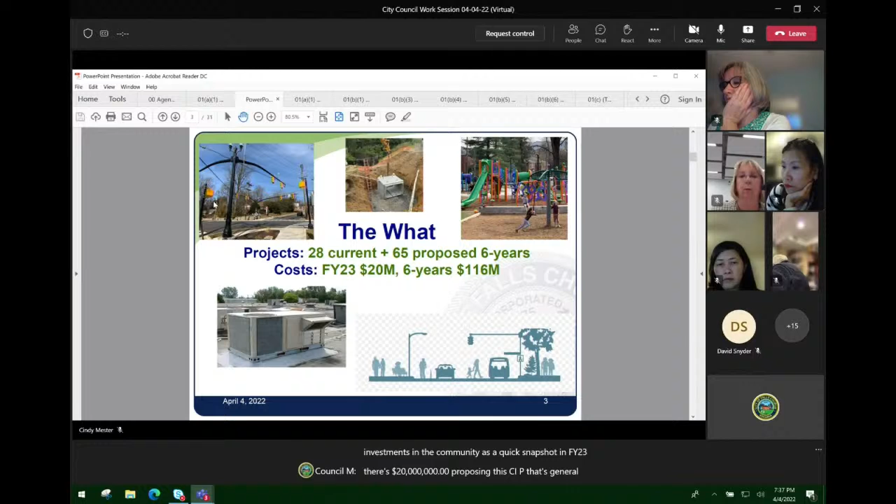As a quick snapshot, in FY23 there's $20 million proposed in the CIP—that's general fund, transportation, stormwater, and sanitary sewer. Over the six years, you can see $116 million. A lot of good active projects are underway, and we give you that update in the quarterly snapshot. The January 22nd snapshot, the most current, is posted with your packet this evening. A lot of great accomplishments as we continue to deliver projects on time and under budget, meeting community needs through the COVID period.

Now jumping right into projects, I've organized the next few slides by the functional categories as they're posted in the CIP. Everything is on the CIP with the link you received this afternoon via email, and it will also be in the slide presentation at the end. For each of those, you'll see I've flagged a tab notation here on this slide, so if you go to tab 4 or 5 on the website, you'll get more detailed information for these projects that we've summarized here.

You'll see the same for Rec and Park or Utilities, for example. Under public safety and information technology, these are really our core infrastructures. There is funding in the CIP for Fire Station 6, public safety radios, facility security, and core infrastructure reinvestment on the IT front. A few highlights that I'll make for each of these projects, and of course myself and staff will be glad to answer any additional questions on a deeper dive.

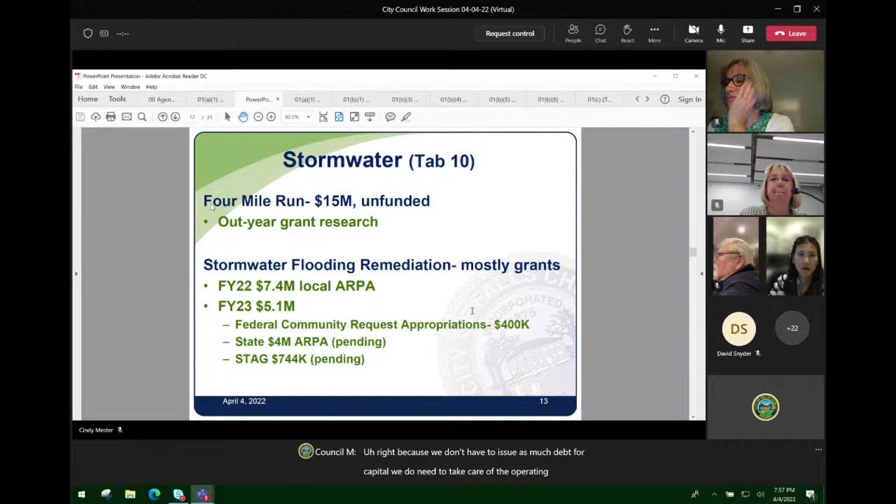Now, where are we in terms of some of the projects? I wanted to highlight that. We have quite a few projects in planning and design, some with planning complete, and we can proceed into construction, as you can see. These are outlining the big 6, as well as the greening of Lincoln, which is $2 million. Under transportation, I noted the $2.5 million for the Lincoln greening project, which is both transportation and stormwater.

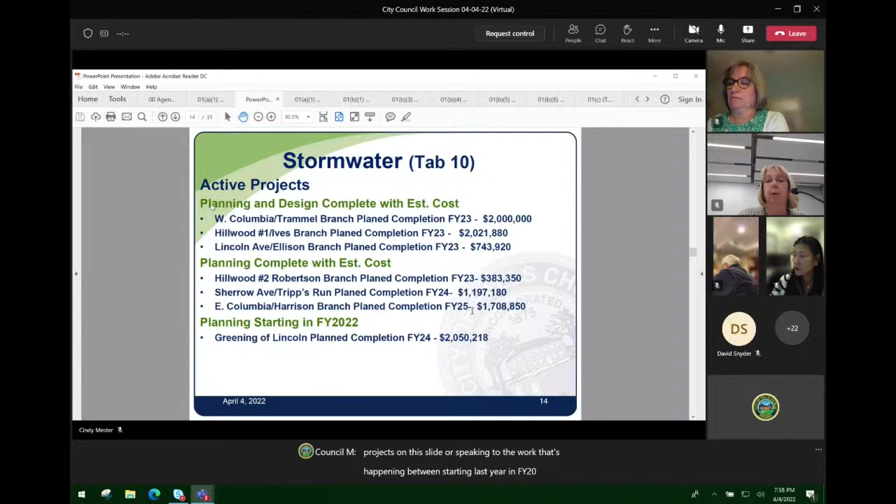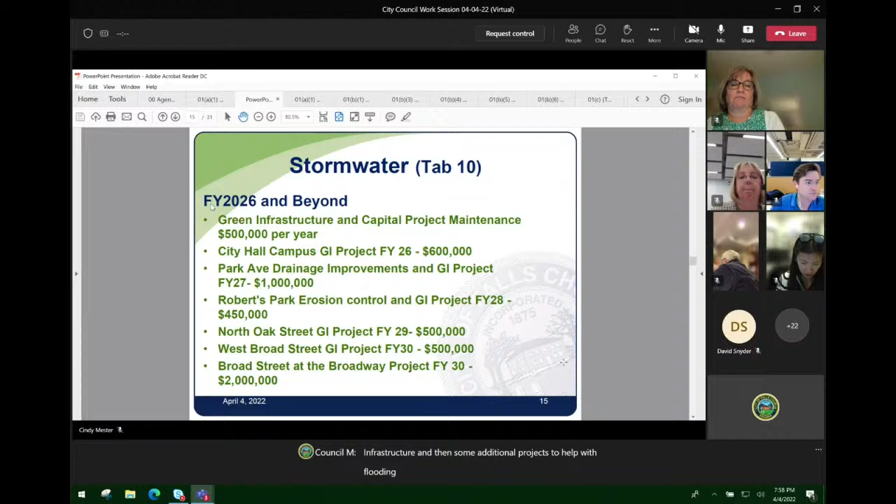And then the CIP also looks towards the out years for additional funding from FY26 and on, because a lot of the projects on this slide speak to work happening starting last year in FY22 through 24 and 25. The completion dates are listed there for you, but we want to make sure we're still continuing to look ahead and address additional projects known from the task force work, the original watershed plan, as well as staff assessment. So you can see here an ongoing commitment to green infrastructure and some additional projects to help with flooding remediation. All of these, sanitary sewer and stormwater, are under tab 10.

So we talked a lot about the what, a little bit about the how, and then we'll open up for questions. In the CIP, we did continue for the second year the equity lens and have added the environmental impact lens that was directed and requested by the Planning Commission. Both of these are the same lenses used as part of Council's legislative program as well. Staffing.

We have a lot of projects, as I noted, and a lot of grant dollars and funding committed to these, but we've got to be able to execute and deploy. So I wanted to provide a synopsis of where we are on staffing.

Under the existing column, we've organized it by project management, procurement, contracts, and grants. We definitely have to have staff that can oversee the concept, design, engineering, and then execution, implementation, and construction. But we also need procurement, contracts, and grants. That's an important piece, especially now that we're doing significantly more with federal funding, which requires a different level of procurement, contract, and reporting. In terms of ARPA, it significantly escalated the reporting we'll be doing to the U.S. Treasury.

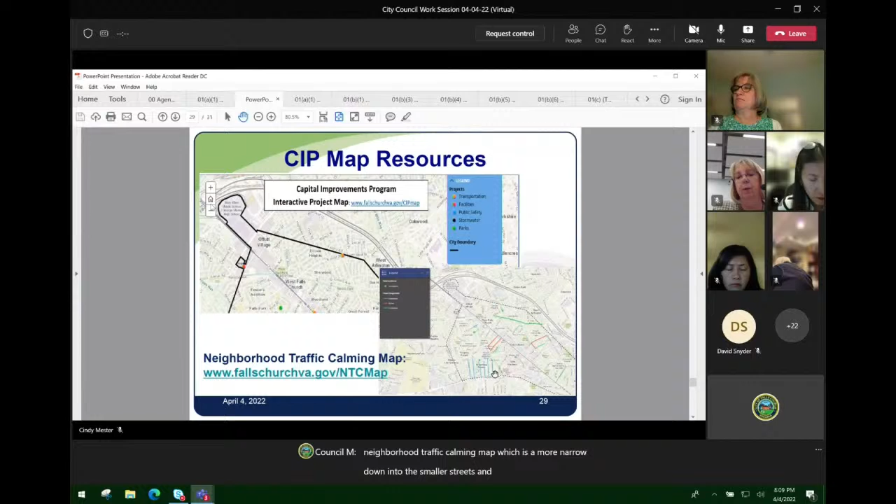So those are both on the website and community resources, as well as the website links we've mentioned previously for the budget as a whole and the CIP in particular. Both of these links will get you to the new videos that have been produced for our budget, the departmental ones and the CIP one. And then for the public, how to reach me with questions.

And with that, Mayor and Mr. Shields, I'll be glad to pause now and look forward to comments and questions.

All right, thank you very much. Thank you for that very thorough presentation. As I'm sure is obvious to all, there's lots of capital work being done here in the city and lots planned for the future. And as you mentioned, we have been aggressive in seeking grants to ease the burden on our taxpayers and have been quite successful, with a number of projects going up throughout the city over the coming years and in the past years that are funded in part or in whole through grants.

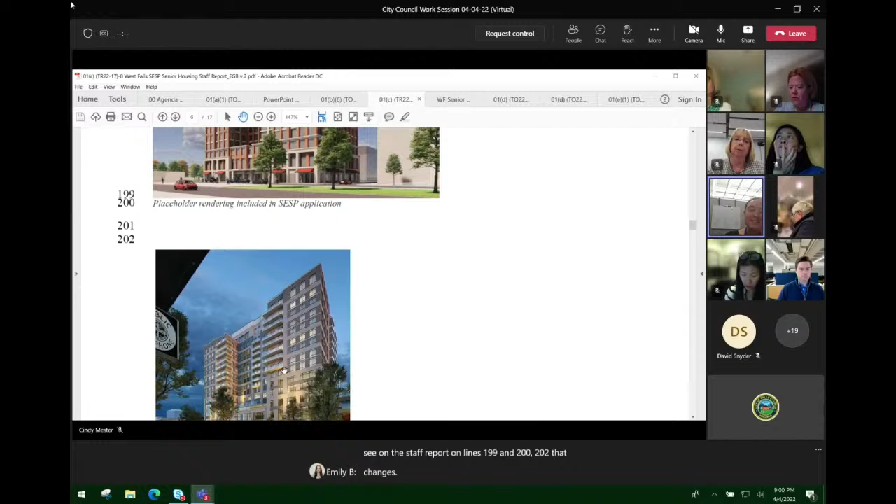We went from a red brick material to a more white-gray brick material. You can see on the staff report, lines 199 and 202, the changes. The changes in the renderings are very nice images that kind of point those out.

We also had a change in unit count and unit size. The unit count change was nothing too substantial — we went from 215 to 212 units. We also had a slight change in parking.

For the comprehensive plan analysis, that begins on line 221. We also have an analysis of urban design guidelines and a look at the past ULI TAP study, which begins on line 296. Again, going through comprehensive planning goals, they begin on line 330, and then moving into our special exception site plan analysis, where we go through the primary criteria and then secondary criteria. This begins on line 395 of the staff report.

To wrap up my presentation, I have two more things. Line 555, the fiscal impact analysis. After further discussion between planning and the EDO, staff does not believe it is necessary to rerun the FIA, as the change in unit count is so minor.

And then timing. So right now we're with you guys in your first work session on April 4th of 2022. We anticipate coming back on April 25th for a first reading and then a boards and commissions referral.

Something important to note about the boards and commissions that will be seeing this project: we're only including the code-required boards and commissions. So we have the Economic Development Authority, which is part of the land ownership group, the Architectural Advisory Board for architecture changes, and the Urban Forestry Commission, in addition to the Planning Commission. We have a second council work session noted for July 18th of 2022, and then a City Council reading and final action for the beginning of August, specifically August 8th of 2022.

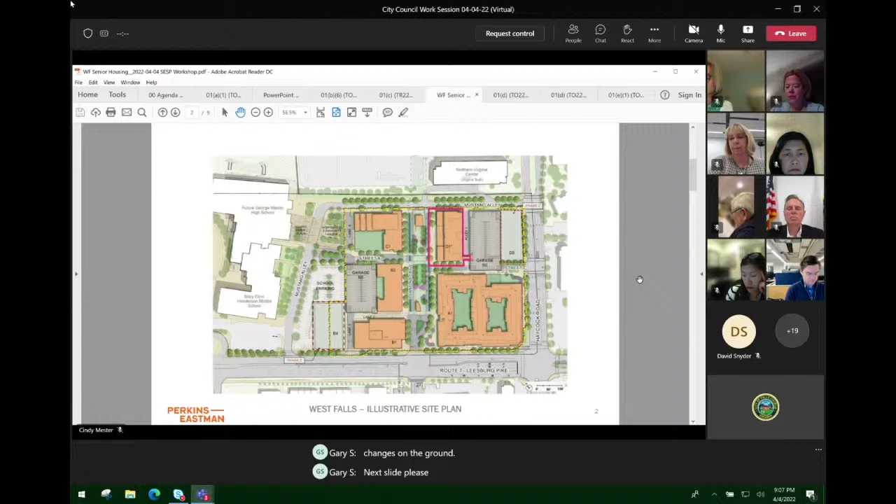So the sugar cube diagrams, as we refer to these, in the original SESP there was nothing more than a white mass indicated for the development of the senior living building. Now we've filled in the detail on the images on the right-hand side of the page, and you can see a building that's been developed with a residential character. We've noted 4 different things that are different from the original SESP.

Conceptually, it's still a C-shaped building that faces the courtyard facing Commons Boulevard. But item number 1, we made the center bar, or the long wing of the C, wider to allow better residential units to occur in the corridors on the residential floors.

We've made the top floor of the building just the center bar itself, that straight bar that runs across the building. That helps to create articulation at the skyline, which reduces the effective visual mass of the building. It also gives us some very nice roof terraces on the 14th floor for our amenity space.

We've created a mechanical yard on top of the penthouse floor, on top of the 15th floor. That's where all our rooftop mechanical equipment will be, and our elevator overruns and those things. They're within a screen wall, so nothing on the roof will be seen from the ground.

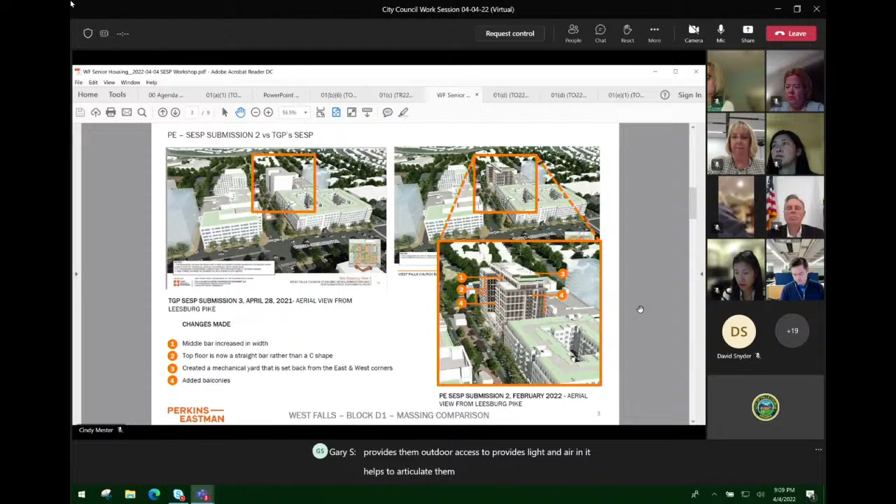Next slide, please. So this is just another view of the building, and okay, we can stop here.

This is great. So when we talked to you about the SESP amendment and the addition of the 35,000 square feet last year, the image on the left is where we were, and we were talking about a building that was 2 colors of brick, red and buff. But since then, we've had some change of thought about the materiality of the building, in large part because of construction sequencing and the ability to get the building built quicker, and that way we can minimize the impact to the rest of West Falls development.

So now we're talking about an architectural precast material, not a brick material, and we're looking at tones of light gray and dark gray, mainly because architectural precast, which is a very handsome material, will allow us more depth and shadow and variation in the facade of the building, but it's a material that doesn't look good in red tones. And since there are precedents in the development for gray and white buildings, as well as red and buff buildings, we didn't feel like the red and buff was any longer appropriate. So we've transitioned to a light gray, dark gray kind of material.

The next slide shows our building from 2 views, both from West Falls Station Boulevard, but you can see the 2 materials in the center of the building that we're proposing. They are stone-like material, but they're actually precast concrete. We're still doing the 2-story read on the building, so the light gray bands and the dark gray receding tones still work the same way that they did when we had a red brick building, but instead we're going with these grays, which are more sedate.

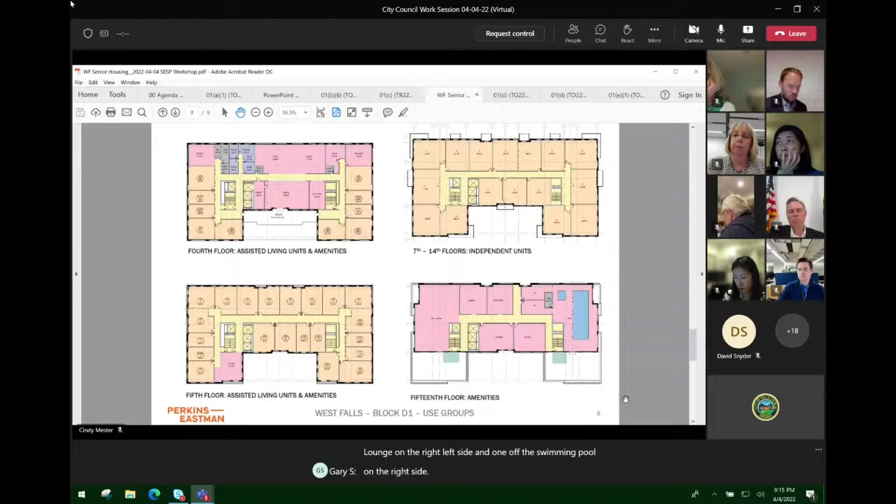Changes to the program since we last talked: we are now talking about 206 units, but may in fact drift up to the 212 previously discussed in the text. We've also added bike parking at the bottom of the page. We've calculated our parking on the basis of retail for the retail uses, and because there is not a senior living use in the bike parking ordinance, we've chosen the hotel use as most similar, and sized our bike parking accordingly.

In the box at the top of the page, we talk about the size of the project. We've already addressed that the building was approved to be 260,000 square feet, which is where we are. Currently we are at 206 units, but may in final design increase a few more, while certainly staying below the 225 in the original SESP, and probably below the 212 approved back in August.

And with that, if there are any questions, I'd be happy to entertain them.

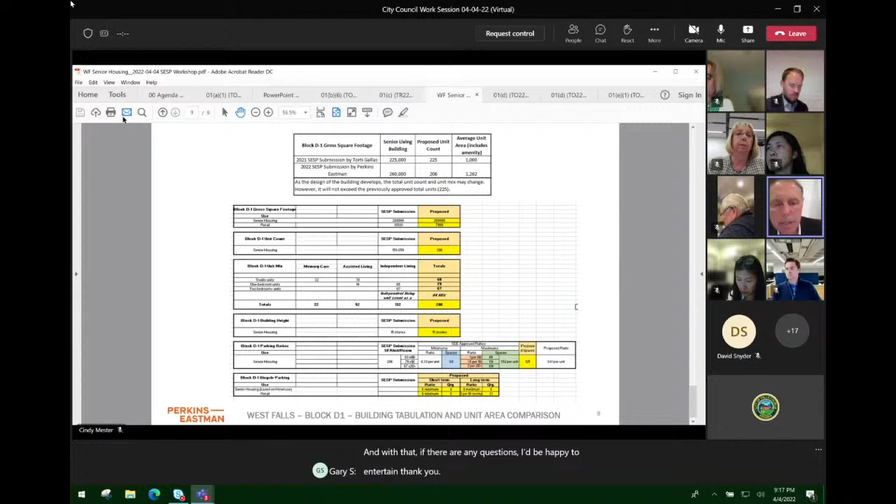Ms. Hardy? Hi, just a quick one. So I like the change of color from red brick to the white and the gray. Could you describe to me more what the material differences are? So instead of using brick, what exactly is proposed?

So these are what are referred to as architectural precast panels. They're typically large panels, maybe on the order of 10 by 12, 14 by 16, with the windows built inside of them. They come and are hoisted up and welded in place. They have a finish on them that looks somewhat like limestone.

So it's a relatively smooth, fine finish. You can see the 2 little biscuits in the middle of the page there—those are actual samples, about 3 by 5 inches each in reality. It's a nice, rich finish. There are joints between the panels, but those generally align with windows and floors, not like the joints you'd have in brickwork every 3 or 4 inches.

Got it. So I'm a fan of the lighter colors—it reminds me of the condo building done in white, which we were all fans of. If we have less red brick, I'm totally okay with that. I know the mayor often talks about cementitious panels, so my only concern is whether that meets our standards. Thank you.

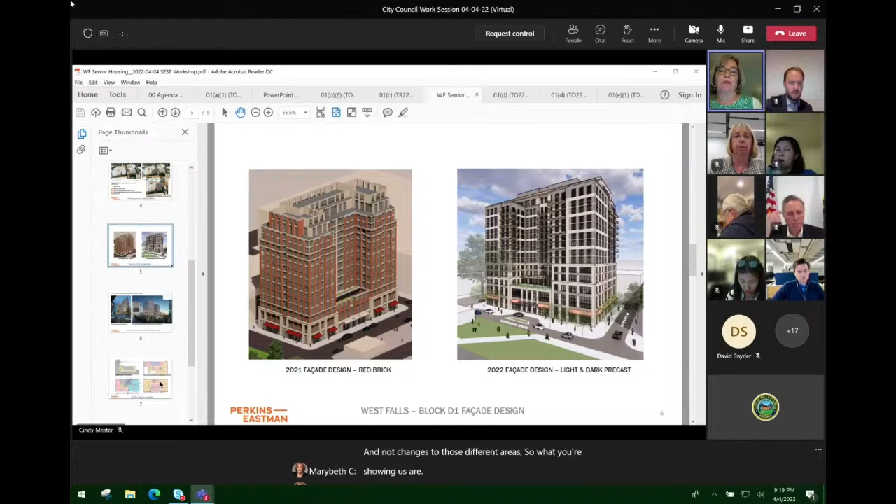Okay, Mary Beth Conley, you're up. Just a quick question—I know you made some changes because of COVID to those different areas. So what you're showing us is a safer way to do assisted living for seniors? Yes. Okay, that's my only question. Thanks.

And the operator for this facility? Yes, I'm Bill Brewer with Trammell Crow Company. We are trying to work with a group called SRG, Senior Resource Group. They're based out of San Diego, California, and we're partnered with them on our 765 John Carlyle Senior Living Development in Alexandria, Virginia. So we're excited to be working with them.

Got it. Mr. Shields, could you remind us what our comprehensive agreement requires? What's the deadline for that? So the outside closing date for the plan for the majority of the leasehold is this April 30th. And then the outside closing date on this senior component is 9 months after that.

So I'm sorry, I correct myself—it's 10 months after that. So the closing date is required to be something like February of next year? I believe that is correct. The 10 months after April 30th is the amendment that was enacted earlier this winter.

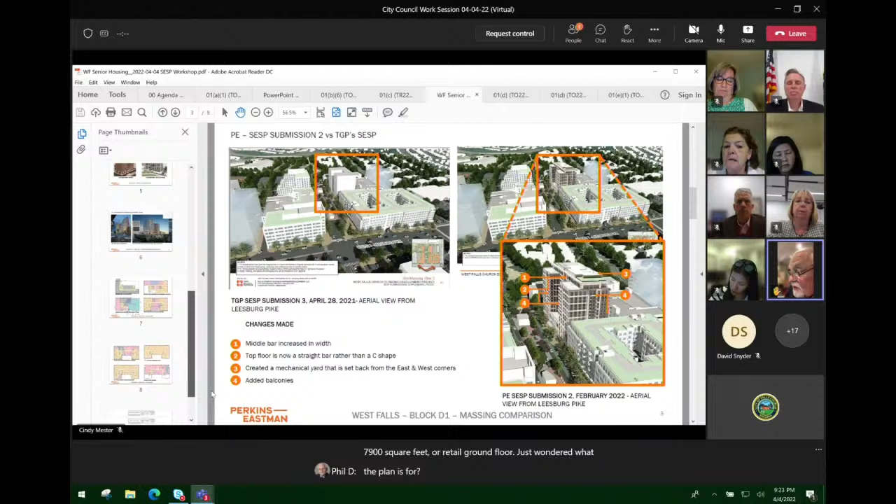All right, thank you, Mr. Duncan. Thank you, I just want to go back with one question. So there's 7,900 square feet of retail ground floor—just wondered what the plan is for selecting tenants for that, the build out, and the timing of when the ground floor retail would be opening relative to the residential part of the building.

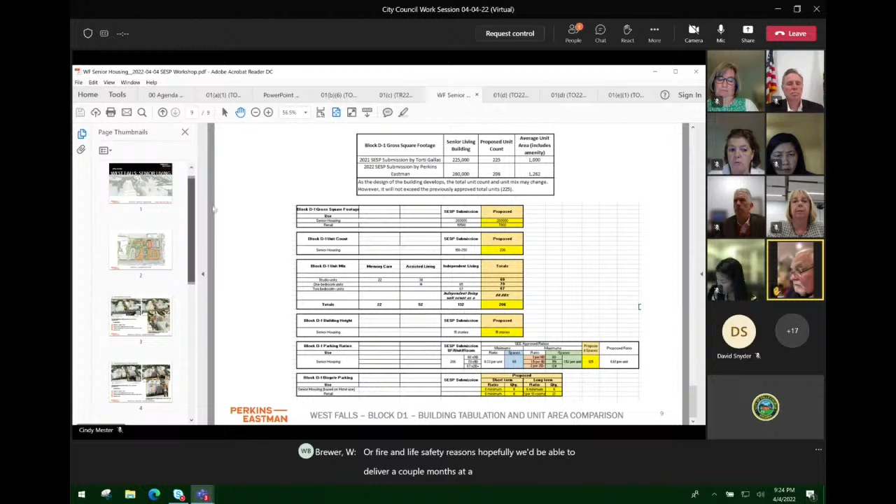So we would anticipate opening that ground floor retail fairly close to the completion of the tower for fire and life safety reasons. Hopefully we'd be able to deliver a couple months ahead of time, and then based on our development schedule, call it 24 months from May of 2023, so May 2025. Okay, great. A couple months ahead of residential occupancy would be terrific.

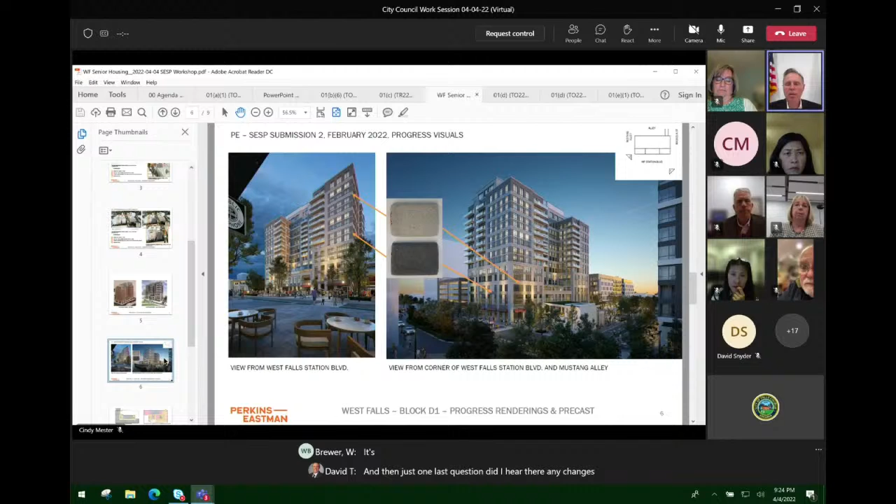All right, thank you. And just one last question. Did I hear there are any changes relating to parking, or was I just kind of lost?

Okay, so your building, how many total parking spaces for your building then? We'll have 125. Okay, and you've got 206 units, maybe 212 units. So we typically size our parking off of our independent living count, just because there is no demand on the assisted or memory care.

Although I would say you're going to have employees. I don't know how many employees you intend to have, and then also visitors. Yep, and that was part of it. The visitors will likely use, and we'll have a reimbursement system set up for the transient parking in the garages. It seemed like a retail parker would use those. So that's handled there. And then on the employee side, we expect most folks to come through Metro. And then inside of our 125 spaces, we would allocate a few for retail parking.

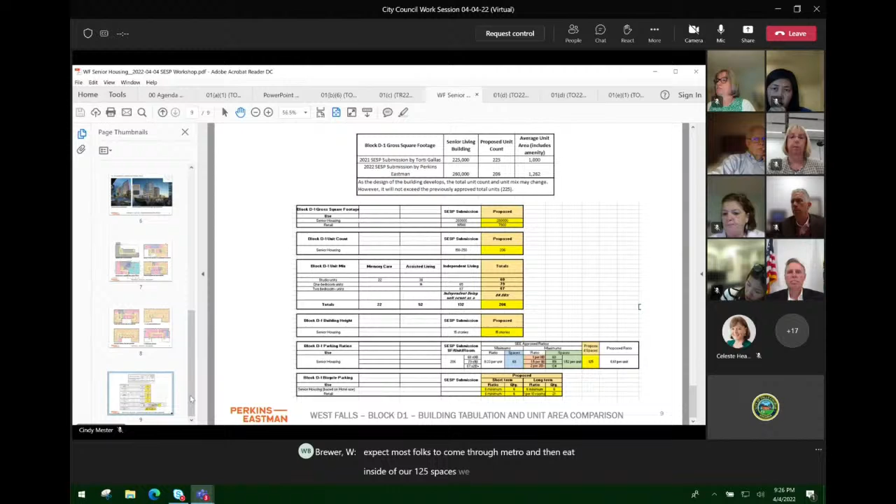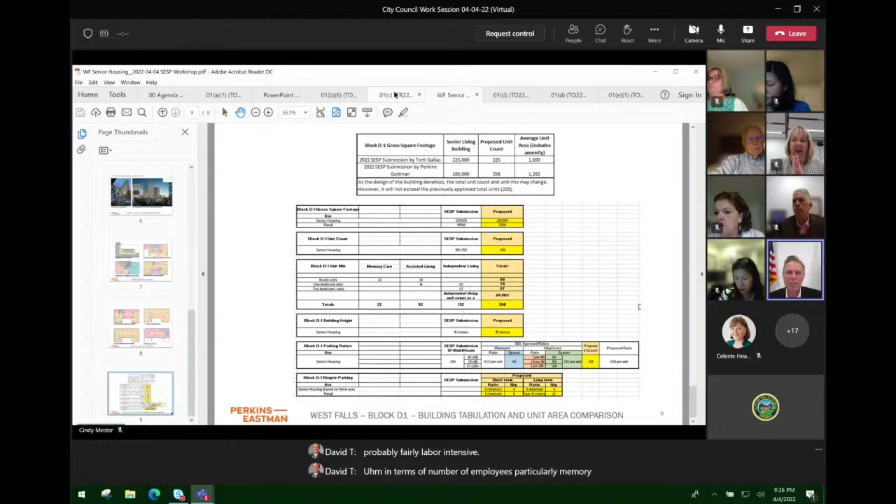Gotcha, and maybe it's a question for staff: is there a TDM here? In other words, any requirements for that, Metro contributions or the like, to try to encourage people to get out of cars, because I know it's probably fairly labor intensive in terms of number of employees, particularly memory care and similar uses. I'll just say this, I won't belabor the point. I would just ask staff to review and make sure we're comfortable. We do have a similar product in town, the Kensington, and I know at times there's been issues about parking there. So I would just suggest staff take a look at that, particularly in light of our actual numbers at the Kensington.

Yes, we can do that. Thank you, okay, that's all I've got. Anything else from anyone? All right, thank you all for coming out this evening, and we'll be, I'm sure, talking to you soon.

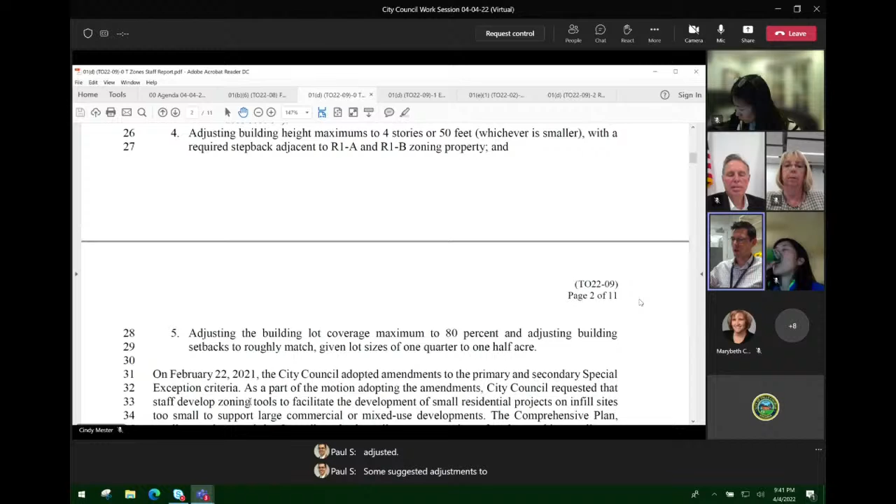There's also a series of suggested adjustments to the setback requirements—front yard, side yard, and rear yard—which would make it possible to get to that 80% lot coverage on a lot size of about a quarter acre to a half acre. There is an increase in the rear yard setback requirement when adjacent to an R1A or R1B zone property.

If we go to line... I'm sorry, my editing marks cover up my own line numbers. Line 31.

Just going through the history of this, as the manager already said, looking at the T-zones was part of the council work plan. The impulse for this was back in February of '21 when council adopted the SE code, the special exception code changes. There was also direction provided that same night that staff develop tools to allow for infill development on smaller lots. Staff has been working on that since then, engaging council in 3 work sessions, listed on lines 39 and 40: June 21 of last year, November 22 of last year, and January 18 of this year.

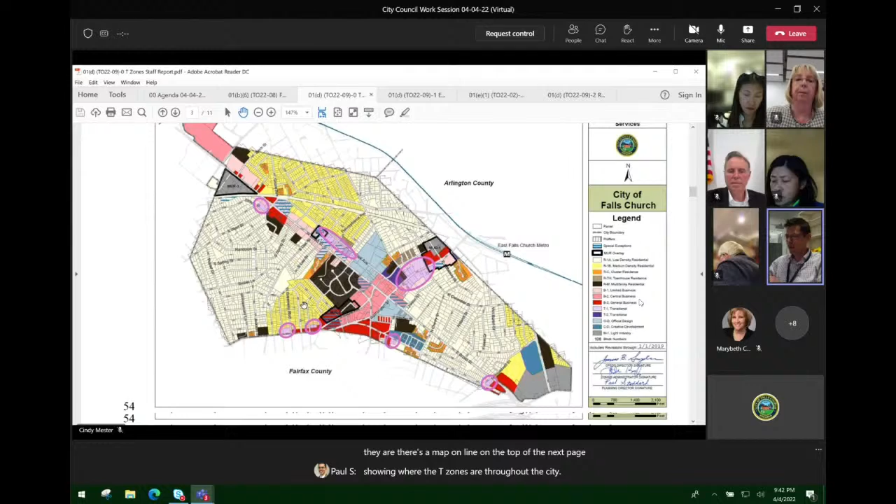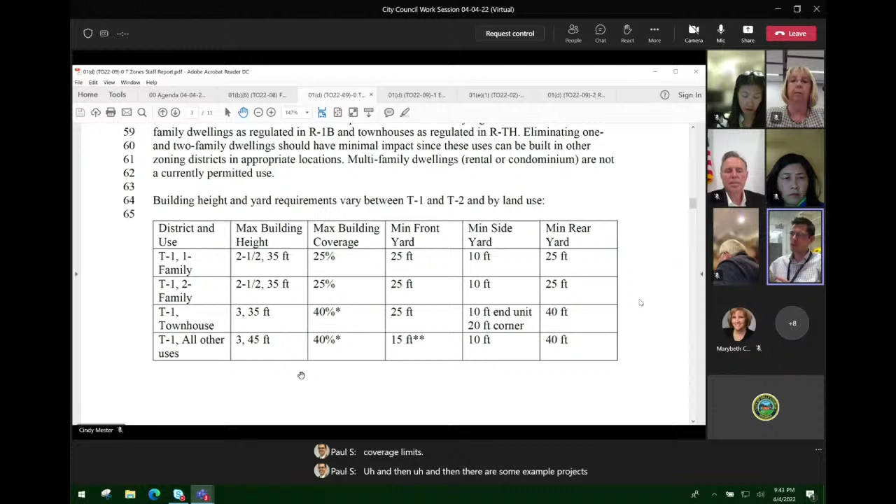The remainder of these materials, I think, are all things you've seen before, so I'll just touch on them briefly. Line 42 provides a summary of what the T-zones are and where they are. There's a map online at the top of the next page showing where the T-zones are throughout the city. Next up is a chart summarizing what's allowable in T-zones today in terms of building height, setbacks, and lot coverage limits. Then there are some example projects, whether they're projects in the city previously proposed for development, or example projects from around the region, with their summary statistics and attached graphics and charts.

As I mentioned, these have all been in your packets before, so I don't want to walk through them again in the interest of time. I'll leave my report there. Staff is looking for feedback from council on this draft language.

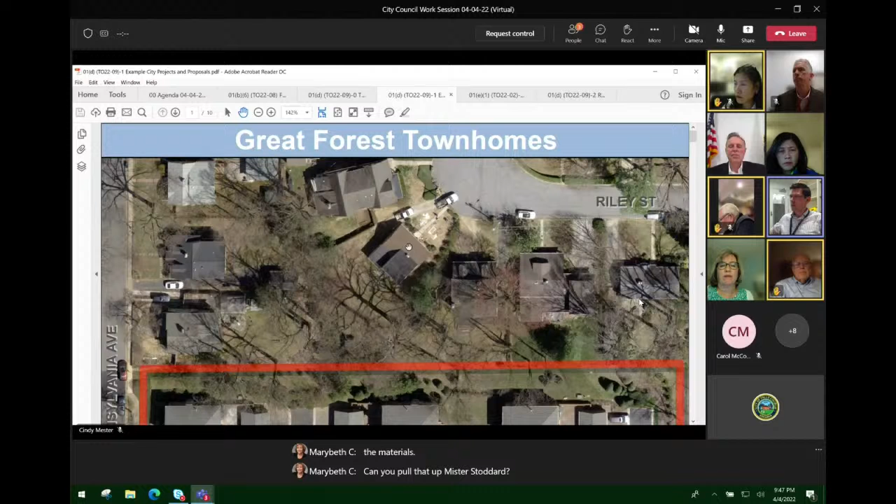So I was appreciative of the map that was in the materials. Can you pull that up, Mr. Stoddard? Yeah, it's at the top of the page, line 54 of the staff report, top of page 3. Thank you.

Which highlights like 6 areas that we're talking about, which is not a ton. So my one question is, the people that we've heard from that are concerned seem to live on South Washington Street. The areas that they're concerned about have going concerns on them right now.

So odds of those actually changing are pretty minimal. Is there any thought that if there are concerns in some areas and not others, we could do a partial transition to T-zones and come up with another designation? Or does it have to be all or nothing?

That's my first question. And then my second question is, as we look at that big circle there on North Washington Street, how much of that is already filled with buildings that aren't going anywhere anytime soon? I mean, a lot of it is Sunrise. Well, that's there, it's not going to go anywhere. So the concerns that people have, I just wonder, while I understand the concern, how valid is it that there's going to be a huge change right in their backyard.

Sure, so the short answer is, could it be different in different areas of the city or for different parcels? The short answer is yes. There are certainly a lot of ways to split that. It could be, you could establish a minimum or a maximum parcel size that could access these uses. You could establish it by geography of the city. Certainly today, the structure is 2 T-zones, and that would allow you some variation in how you set them. And of course, the approval process itself, whether it's by right or by special use permit reserved to the council, all those things would be options in divvying those things up.

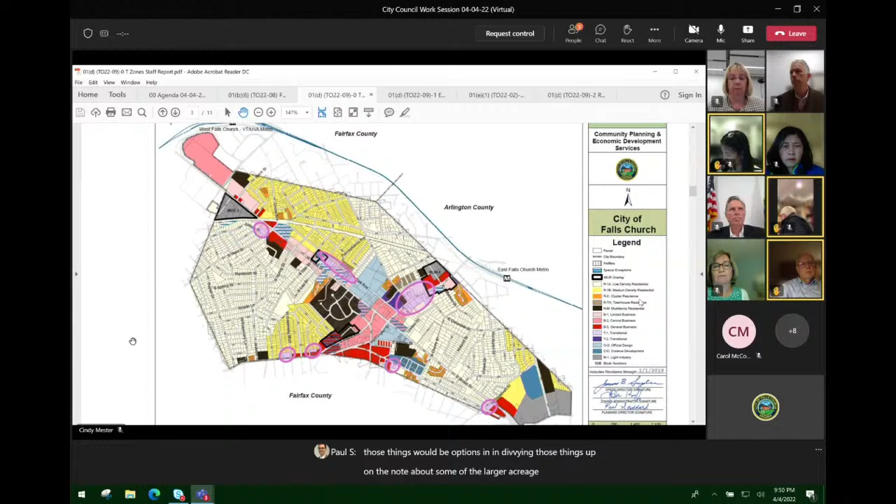On the note about some of the larger acreage parcels already having buildings on them, just a note that certainly these sites where there are larger surface parking lots, especially where you've got, say, a house of worship, a church, there have been successful partnerships around the jurisdiction between houses of worship and affordable housing providers to reuse some of that underutilized land, those surface parking lots, for other uses. So I think it's not necessarily something you'd want to walk people into, but it's an option you might want to leave open as part of any sort of system.

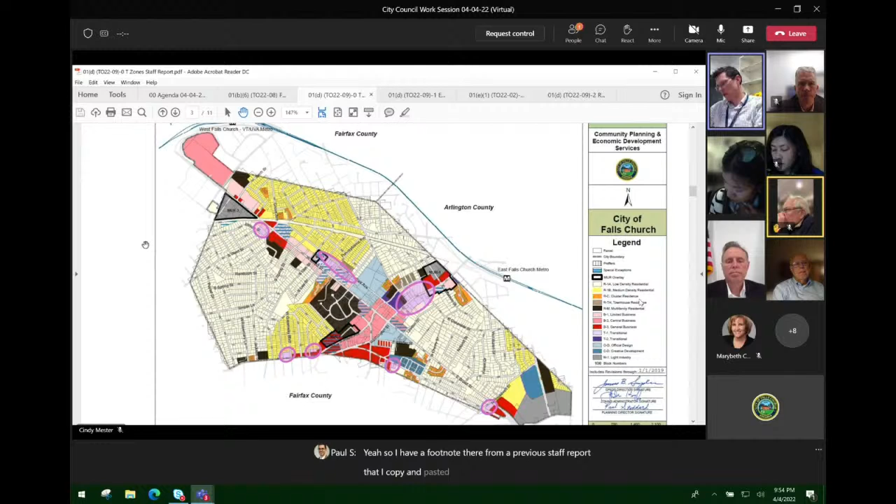Paul, you mentioned that the impervious coverage allowed today because parking lots are by right in T-zones is pretty high. Do we know what that number is and how does that compare to the 40% maximum building coverage? Yeah, so I have a footnote there from a previous staff report that I copy and pasted, and that is on the chart that begins on line 65. The footnote is actually on the page below it, where it notes that there is no maximum impervious coverage limit.

So theoretically, someone could take a T-zone right now and put an asphalt parking lot in the entire thing? Yeah, I'd have to double check whether the parking lot would have to be ancillary to a building on the site, but that is how I read it. Now, any change to a site is going to have to conform to the modern stormwater standard. So whether you're putting a building on it or a parking lot on it, any change in the site that goes over the disturbance limit would have to meet site plan requirements for stormwater.

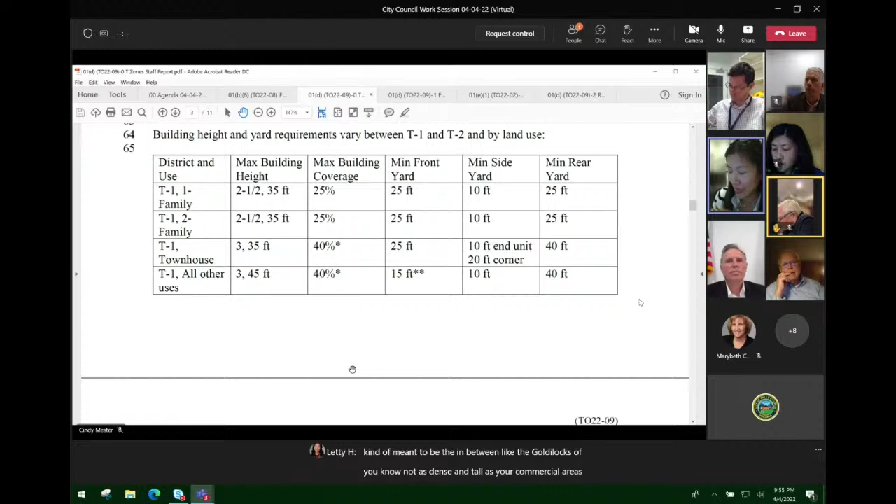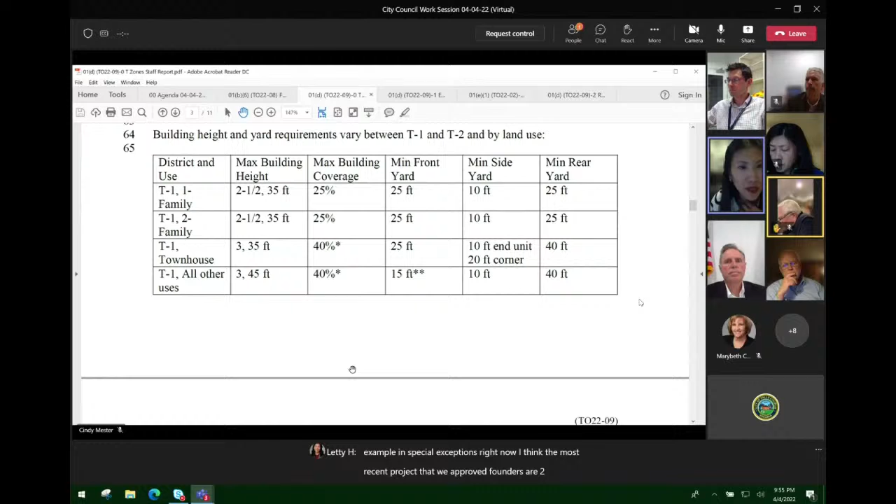Got it. So again, based on the concept of T-zones, it's kind of meant to be the in-between, like the Goldilocks of not as dense and tall as your commercial areas and clearly not like your residential. A lot of what's proposed in the draft language made sense to me. I think, for example, in special exceptions right now, the most recent project that we approved, Founders Row 2, had 15% open space. So in other words, 85% lot coverage. Is that how I'm interpreting it?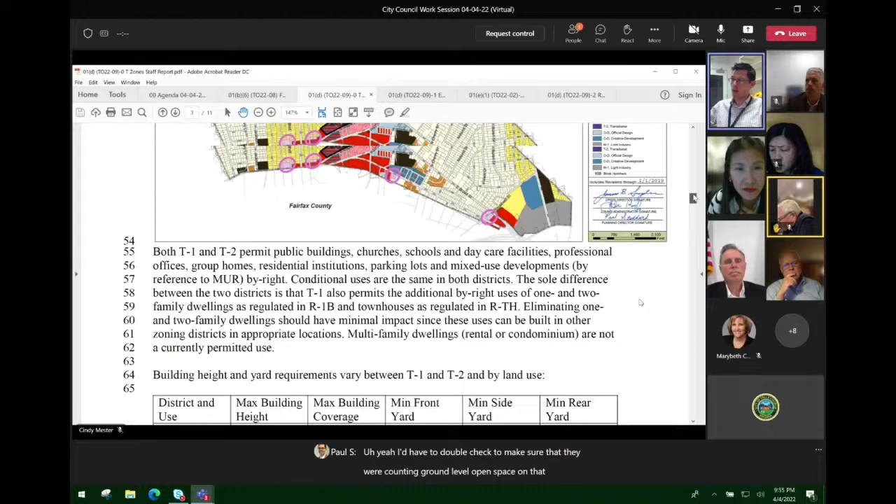That's kind of what we accomplished there. Yeah, I'd have to double check to make sure that they were counting ground level open space on that number. That number sounds right to me, I just need to check what it's attached to. Got it. So 80%, for example, proposed in T-zones doesn't feel unreasonable to me, especially because it's 4 stories with some tapering. That said, that's kind of my first thing, just having that Goldilocks comparison, right? What's allowed right now when we do special exceptions in those commercial areas, what's allowed in residential, and then finding that right balance in between.

I think the second big concept to think about is what sort of voluntary concessions, things that we care about. So under the option to have some more council purview, things like affordable housing are called out, stormwater is called out. For me, those two are really important when we talk about touching T-zones. So the values we have about residential redevelopment and commercial development, I'd like to see some standards around affordable housing and stormwater. I don't know whether that means the process has to go through this conditional use permit process or whether we can just spell it out in the zoning text. What is staff's opinion on that?

So some of that is a legal question that we would want to work with the city attorney on. There are allowances. Is Carol on? Great, Carol, maybe I'll just bounce the question right over to you immediately. Well, I think that obviously the devil's in the details, but for a very simple standard that applies the same way to each property, you can write it into the zoning ordinance.

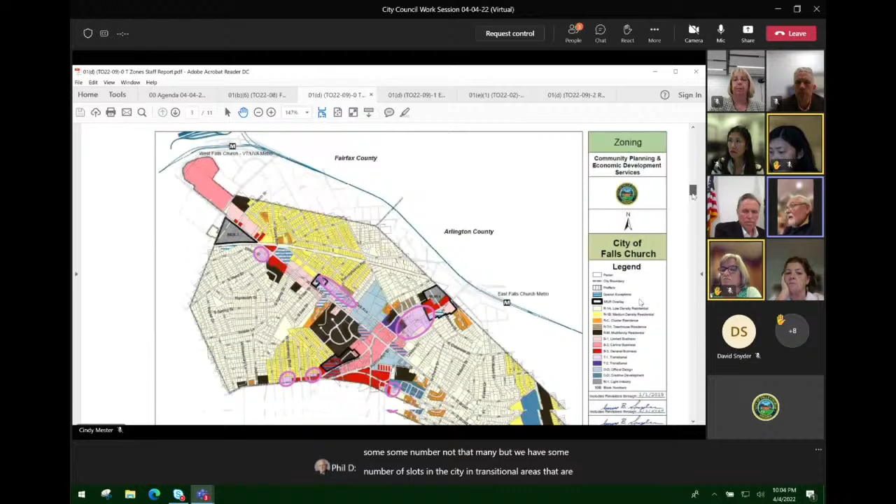Okay, that's good to know, thank you. Stepping back—why are we talking about doing this? To me, the answer is that we have some number of plots in the city in transitional areas that are economically, architecturally, and environmentally underperforming. During the 10-year span when we've been very successful attracting development to larger tracts, we haven't been able to get anything built in these T-zone locations. So what can we do to alleviate that?

My interest is primarily in encouraging the market to bring condominium developments where units might sell for as little as $700,000 or $800,000—starter condos in the Falls Church market, though some would go much higher. I'm trying to find space for two government workers, two teachers, two firefighters, or two cops to put their incomes together and get a hand on the ladder of Falls Church real estate. This is the only way I see us having a shot at that. Of all the great things we've done, we've only built railroad cottages in that middle-income price point, under $1 million—hard to believe that's middle income, but that's how it is.

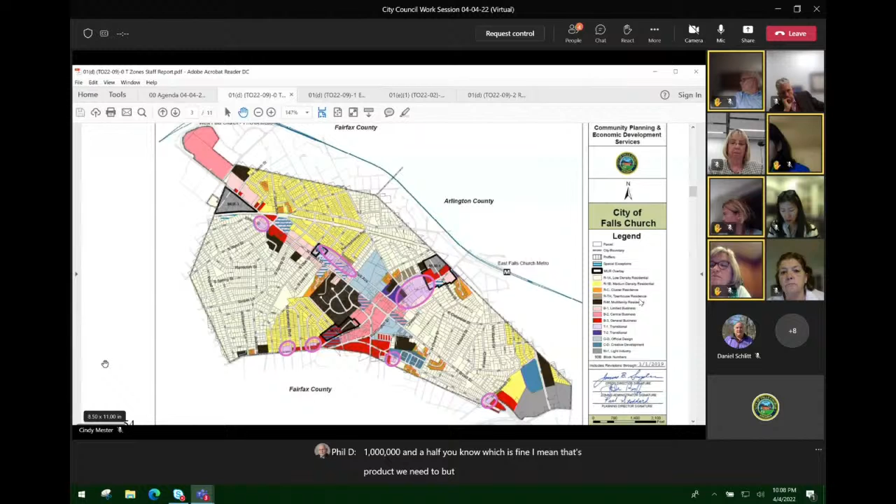But it's not quite what I'm looking for. So I think it would be helpful to see what other jurisdictions are able to attract in terms of that sort of condominium product, and to make sure that whatever language or process we adopt encourages and incentivizes that. I realize we can't require it, Madam Attorney, but I do want to incentivize it.